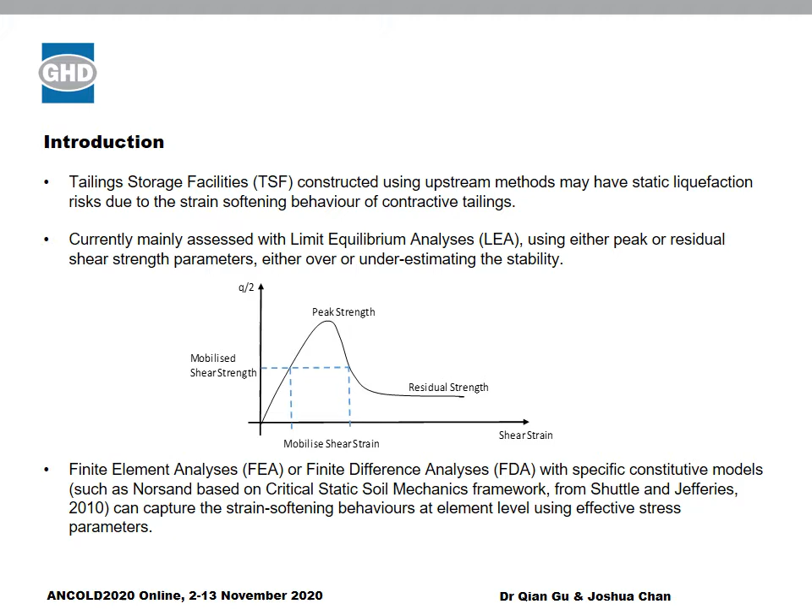Static FEA or FDA analysis, however, will not be able to run beyond the point of global failure, where the peak shear strength is mobilized. This is because of the inherent lack of an inertia term considered in the equilibrium equation of static analysis. So when the system is approaching failure and the inertia effect is becoming more and more important, ignoring that will result in the analysis stopping. This can be shown by the sketch here - the static analysis cannot run beyond a point that's close to the actual failure.

The shear strength reduction method has been used by some finite element software packages to estimate the factor of safety values. Such method relies on progressively reducing the shear strength to trigger the loss of equilibrium. This process, however, cannot replicate the realistic strain and stress paths leading to the failure. And considering the dependency of the engineering shear strength on actual stress and strain path, not considering the realistic path means the actual factor of safeties under undrained conditions using effective stress parameters cannot be produced.

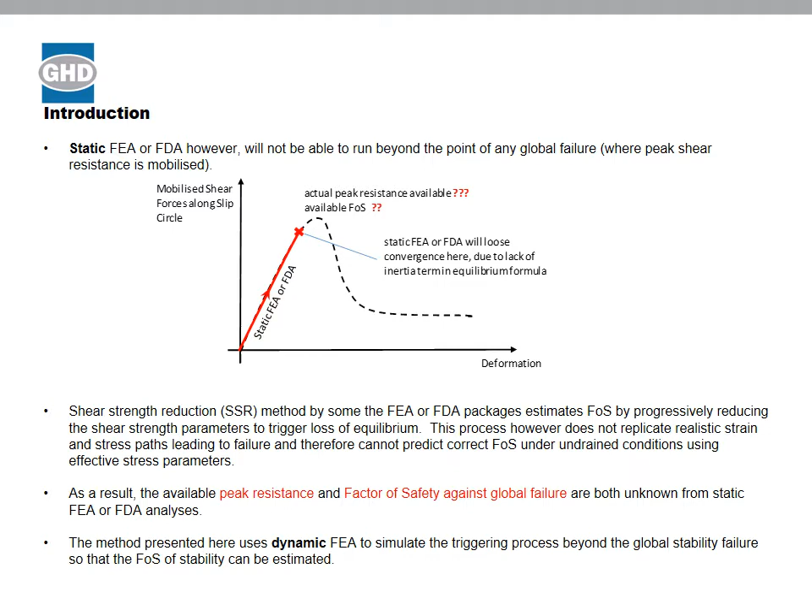The dynamic analysis has been undertaken using software RS2 developed by Rocscience. The reason this software is used instead of other more commonly used software such as FLAC and Plaxis is because of two things. First, this software is relatively user-friendly compared to FLAC. Secondly, compared to Plaxis, RS2 has got a NorSand model incorporated into it recently.

This is the cross-section used in the analysis. The TSF comprises a starter dam and five stages of subsequent raises. The current design also considered a smaller Stage 1 buttress and a larger Stage 2 buttress for increased stability. The cross-section also shows a few locations along the embankment face, which will later be used as output points to investigate the result.

Also shown in the cross-section are a few pre-selected failure surfaces, which will later be investigated for the factor of safety against failure.

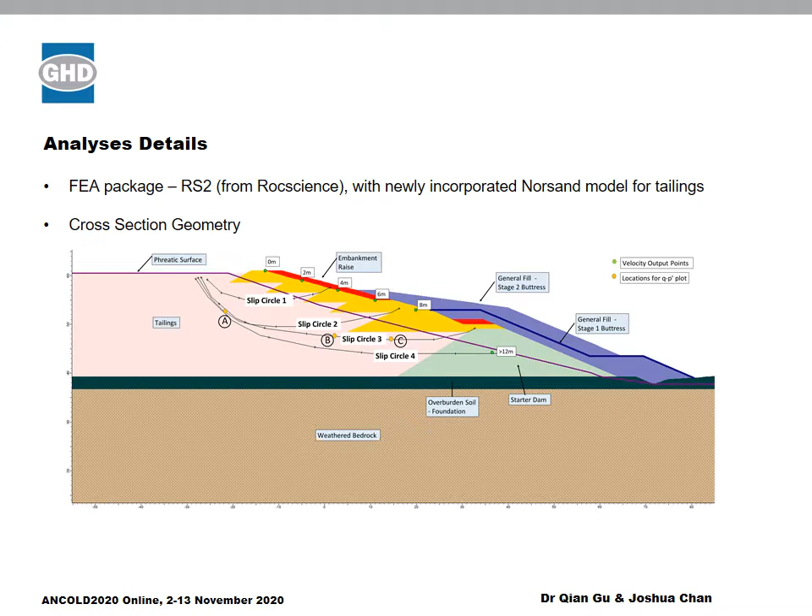Parameters of the tailings: it is mainly fine tailings with 70 to 85% fines, plasticity index between 6 to 10, SG between 3.08 to 3.36. In situ state parameter has been inferred to be between 0.1 to 0.175, suggesting mostly contractive behavior. Peak undrained shear strength ratio estimated to be 0.25, and residual shear strength ratio estimated to be 0.11, based on the state parameter of 0.175 conservatively.

And the CSL parameters are: first, limiting QP stress ratio under triaxial compression condition, 1.37; the intercept of CSL is 1.23; and the slope of CSL, also in the e-log p space, is 0.24. Other NorSand parameters were inferred from calibrating the numerically predicted triaxial test result against the lab result, as can be seen from the next slide.

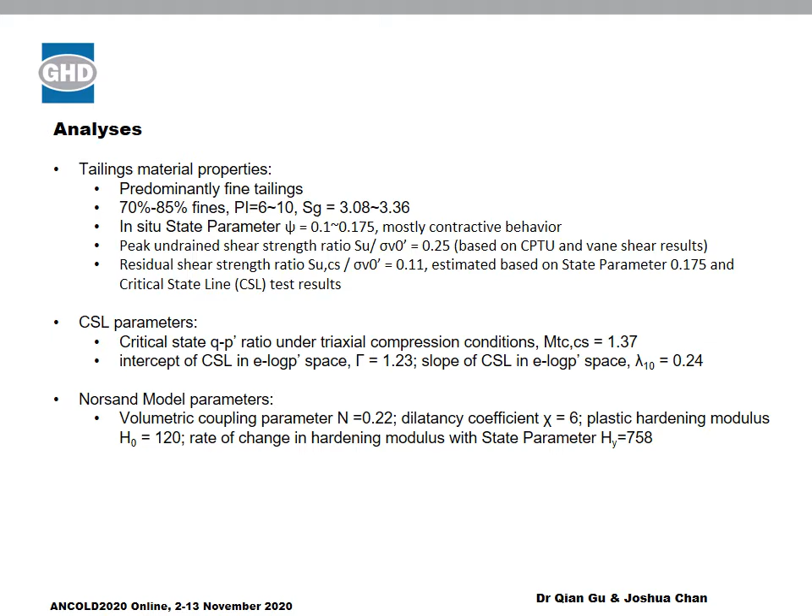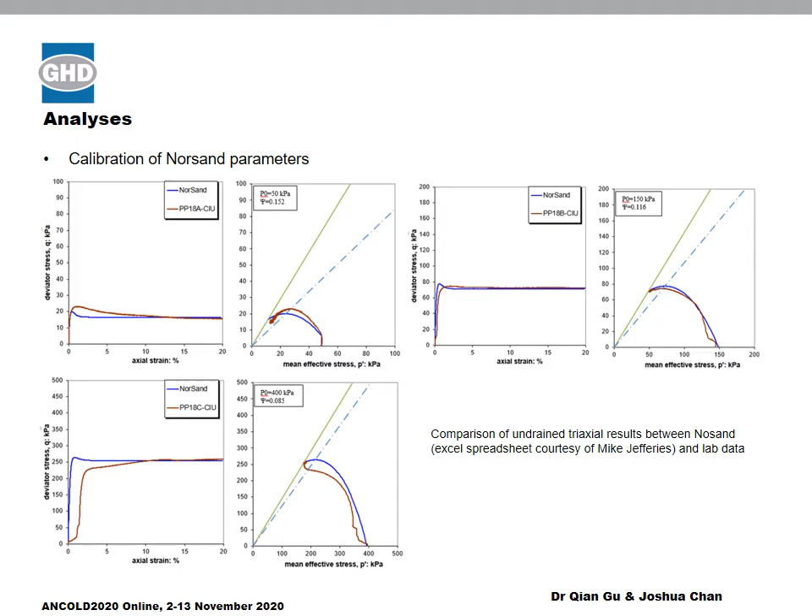This slide shows the comparison of numerically predicted triaxial results using NorSand parameters against the results from laboratory testing. As can be seen, all three sets of tests predicted using the same set of NorSand parameters match the laboratory test results fairly well. It should be noted that different consolidation pressures and different state parameters have been used for these three sets of tests.

The sequence of finite element modeling: first, the construction of embankment raises and also the tailing depositions are all modeled as fully drained stages using static analysis. After that, a series of dynamic undrained triggering analyses were performed, in which surface pressure has been ramped up from 0 to 300 kPa in 9 stages.

At each stage, the pressure was increased linearly by 2 kPa per second, and then maintained at the same pressure level for 100 seconds. The duration of each loading stage has been selected so that the vibration effect can be minimized, while still keeping the total number of increments at a manageable level.

This slide shows the stress path and stress-strain relationships from the numerical analysis. The figure on the left shows the Q-P stress ratio at 3 locations, A, B, and C, as shown here. The figure on the right shows the shear stress against shear strain at the same locations. Three main features can be seen from these two figures.

The first is that the drained construction and tailing deposition stages all follow approximately the K0 line, which is quite low in terms of shear stress ratio compared to the instability line, suggesting fairly stable conditions. The second is that the undrained triggering process all results in increased pore pressure and reducing effective P stress.

And then the last feature is that during the undrained triggering process, the Q stress initially increases with shear strain towards the instability line, and once it's gone past the instability line, it starts reducing towards the critical state line, which represents the strength softening process.

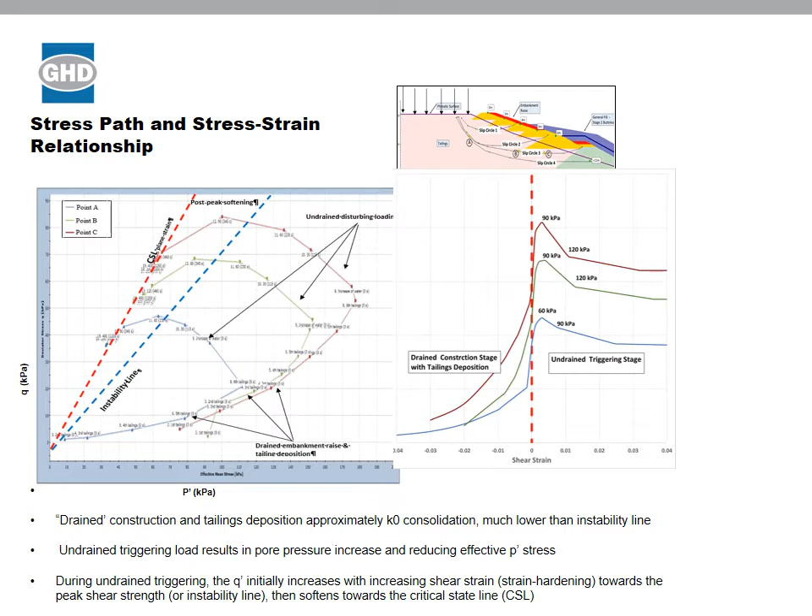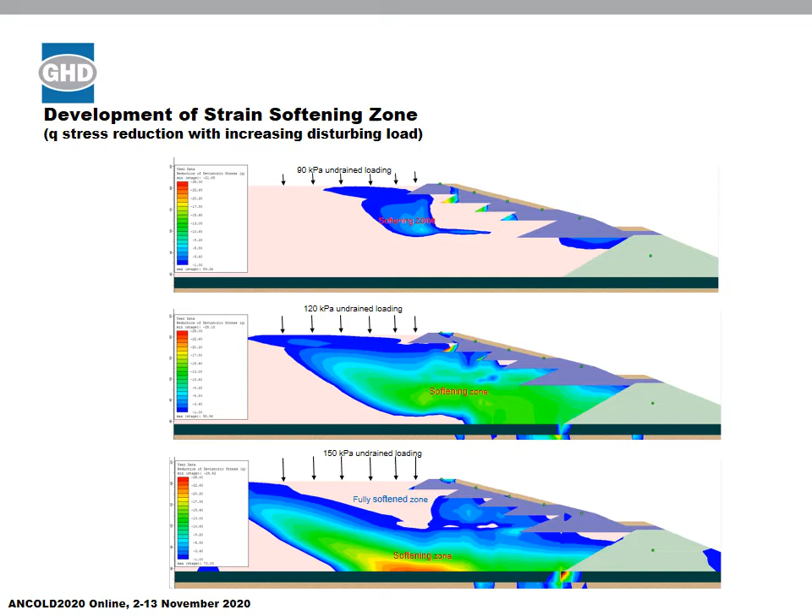The last slide shows the softening of Q stress with increasing disturbing force, and this one shows the softening of the effective P stress with increasing disturbing forces. Here the colors represent the P prime reduction ratio against the original P before the triggering process.

As can be seen, by the time the disturbing force increases to 150 kPa, most of the tailing materials beneath or behind the embankment have reached a reduction ratio of between 60 to 70%.

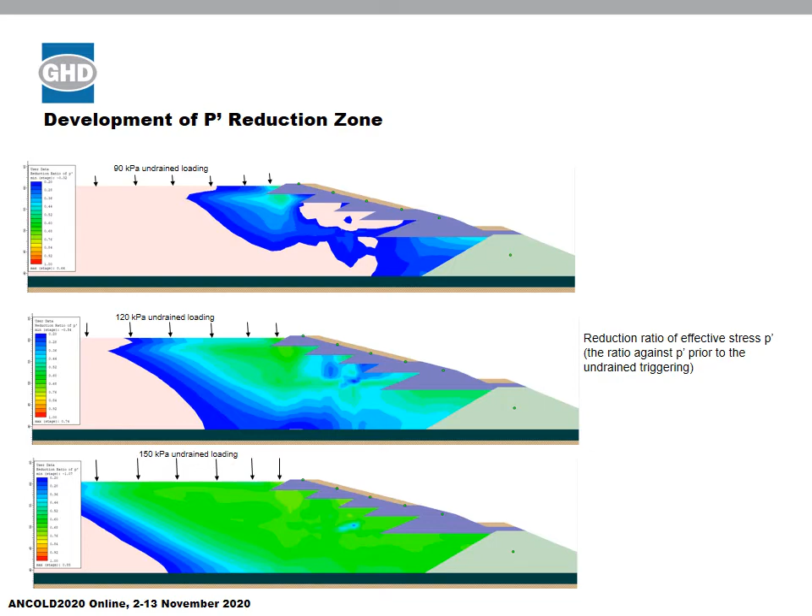Another question is how we can use the dynamic analysis to estimate the threshold undrained disturbance pressure, or the peak resistance available.

By raising the surface disturbing pressure in stages, such threshold disturbance can be identified by two methods: the first is by the appearance of a non-zero residual velocity when the disturbing surface load is maintained at a certain level; the second is by the peak shear stress mobilised along the potential failure surface with increasing stages of undrained disturbances. We will look at these two methods one by one in the following slides.

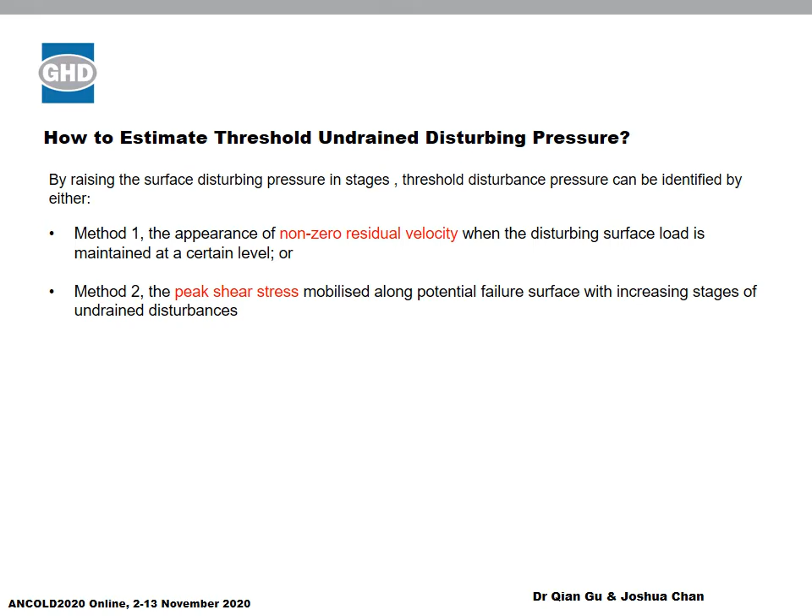This shows how we can estimate the threshold disturbing pressure using the first method. The figure here shows the relationship between residual velocity and different levels of surface disturbing pressure, at two locations: the first is at the crest of the embankment, called the 0 meter location, and the second is 8 meters below the crest of the embankment.

As can be seen, when the surface disturbing pressure increases beyond 90 kPa, non-zero residual velocity starts to appear, which suggests that a global failure along failure surfaces exiting at these two locations may occur when the surface disturbing pressure exceeds 90 kPa.

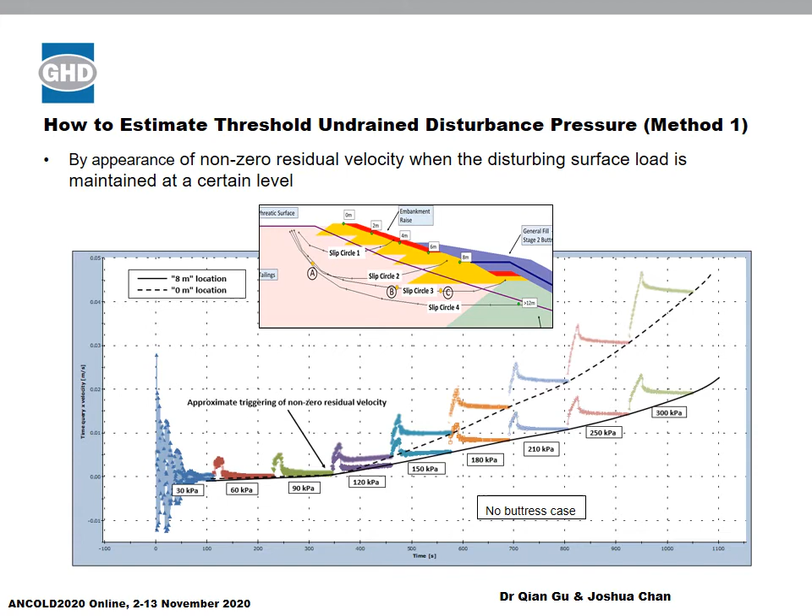The same trend can be seen more clearly when we plot out the residual velocity against different triggering pressures at different depths for cases with no buttresses, stage 1 buttresses, or stage 2 buttresses.

The first figure on the left is the case without buttresses. The triggering threshold pressure is around 90 kPa for all failures. When stage 1 buttresses are in place, the triggering pressure for the deeper failures increases to 110 kPa, and when a bigger stage 2 buttress is in place, any failure deeper than 8 meter depth has a triggering disturbing pressure that increases to 150 kPa.

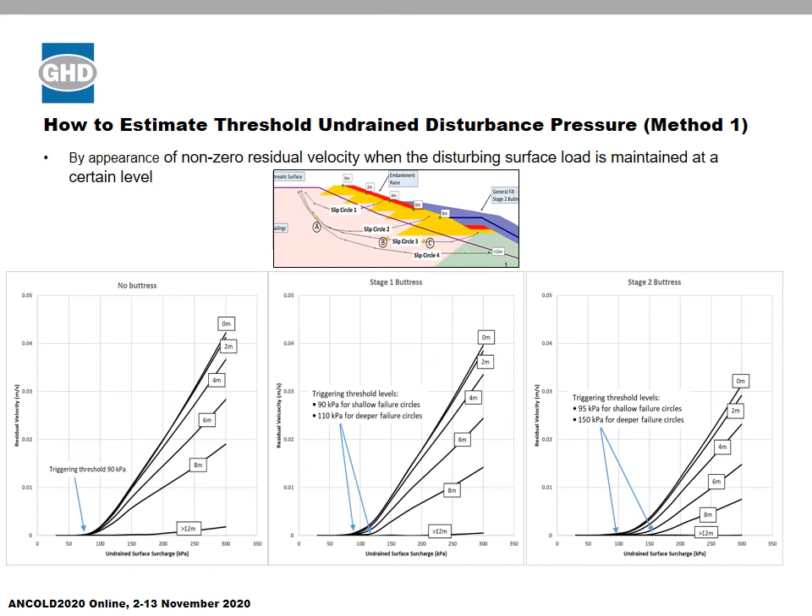When we plot all the results into a single figure, we can see clear relationships between the threshold disturbing pressures against the depth of slip surfaces for different scenarios. In general, the threshold surface disturbing pressure will increase with the depth of slip surfaces.

But it's interesting to know that there's essentially no difference between the two curves representing the no buttress case and the stage 1 buttress case for any failure shallower than 8 meter depth. This is not surprising, considering that the top of stage 1 buttress is actually 8 meter below the top of the embankment. Therefore, any failure shallower than that would not be improved by having stage 1 buttress.

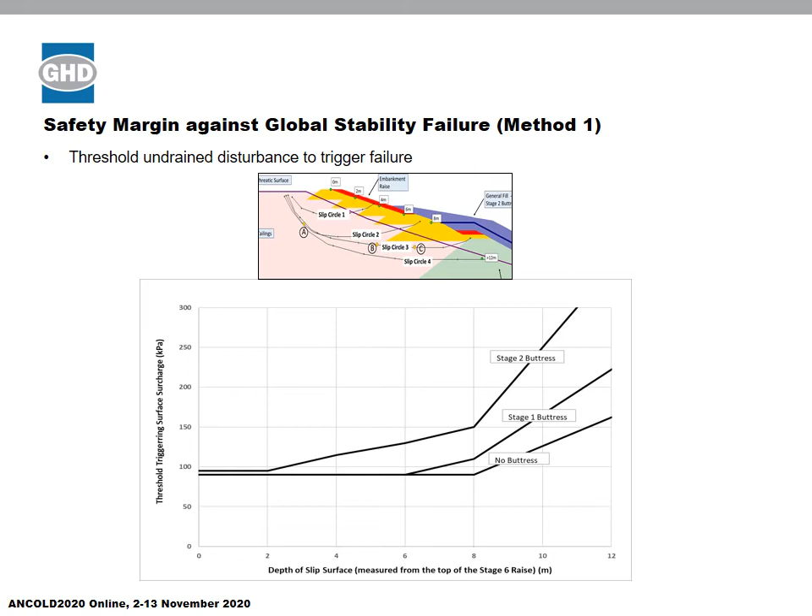The threshold surface disturbing pressure and peak resistance available can also be identified by looking at the mobilized shear stress along pre-selected failure surfaces. This figure shows the shear stress averaged over the entire length of potential failure surfaces with increasing level of surface disturbance for different scenarios. It can be seen clearly that for all scenarios there are threshold disturbing pressures that can be identified, at which the peak mobilized shear strength is mobilized.

What's more important to know is that those threshold disturbing pressures identified using this method are identical to those identified using the non-zero residual velocity method discussed previously.

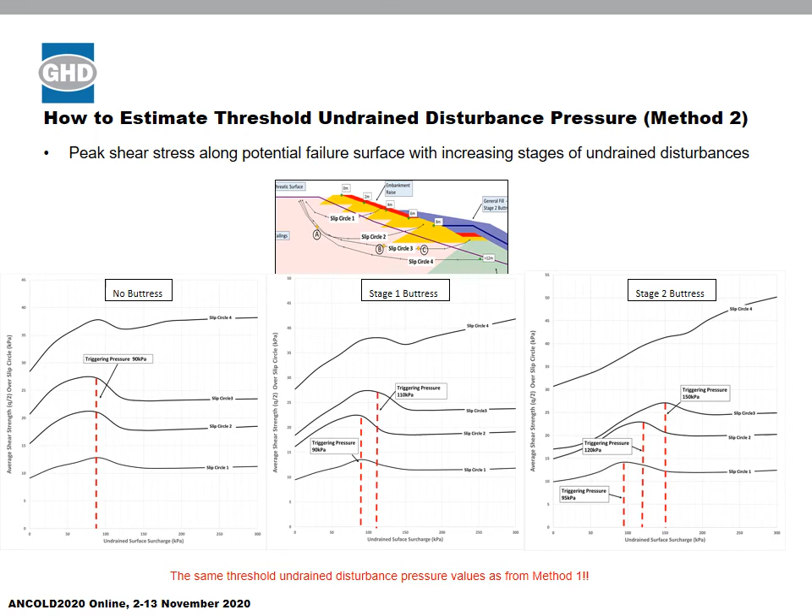In addition to predicting the surface disturbing pressure, method 2 also allows the factor of safety values to be predicted. The factor of safety can be defined here as the ratio between the peak mobilized shear strength against the shear strength mobilized when there's zero surface disturbing pressure.

The values predicted by this dynamic FEA are between 1.3 to 1.6 for different scenarios and also different failure surfaces at different depths. Such values are well within the range predicted by the LEA method, which is between 1.2 to 2, and this is not unexpected.

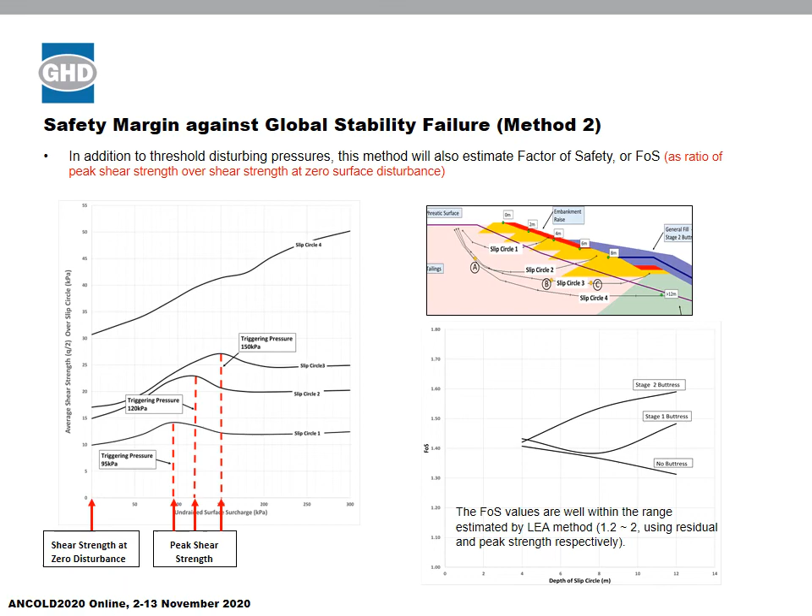So this brings us to the conclusions of this study. Firstly, dynamic FEA analysis using a NorSand model can be undertaken to capture the failure mechanism, including strain softening behaviors of contractive tailings.

Secondly, the loss of embankment stability or the initiation of progressive failure can be identified by either the appearance of a non-zero residual velocity or by a peak in the mobilized shear strength averaged along the potential failure surfaces. The estimated threshold disturbing pressures are the same from either method.

And also the method can estimate not only the threshold disturbing pressures but also factor of safety values against global stability failure. Compared to the limit equilibrium method, the current method has the potential to reduce uncertainty in the estimated factor of safety values, resulting in cost savings.

There are also some thoughts about future works. First, currently only the failure scenario triggered by upstream loading has been investigated, while in reality other failure mechanisms may also occur, due to such as downstream toe excavation, phreatic level increase, or foundation creep, etc. All these different failure mechanisms could have different safety margins and therefore should also be investigated.